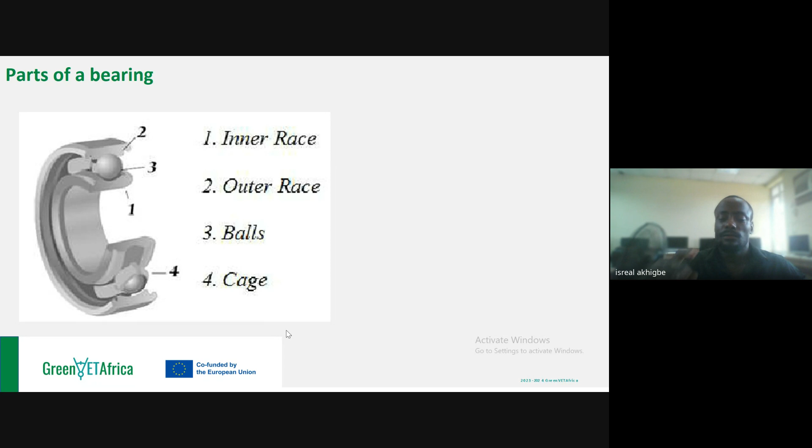So let's proceed to shaft. Now everybody has actually seen a shaft. As long as you've seen a cylindrical piece, whether it is wood, metal, or plastic, it is a shaft. So when you see a cylindrical piece of material, we call it a shaft. If it is wood, we say a wooden shaft. If it is metal, you say a metal shaft. If it is plastic, you say a plastic shaft.

But in the world of mechanical drives, lubrication and maintenance that we use in areas such as waste management, we'll see more often metal shafts. So when I say shaft, it's just a cylindrical piece of material - that's in the layman term. Now, shaft is a member, usually of circular section, which supports gears, sprockets, pulleys, and rotors.

Now this is another component, component number two that supports transmission. Bearing, as we spoke yesterday, helps support rotation by reducing friction and allowing operation to run smoothly. Also, shaft is a member, usually of a circular section, which supports transmission system components - gears, sprockets, pulleys, rotors, etc - and is subjected to torsion or axial load, acting singly or in combination.

So what does this mean? If this supports the transmission system, and the transmission system helps us get rotation from our driver to our driven in our waste recycling machineries, remember that your rotary motion is coming from your driver, and your driver is the source of rotation. It has its own form of power, torque, which is the rotating force or turning force of the body. So that rotary motion from the driver has a turning force - it has some amount of force which can do work.

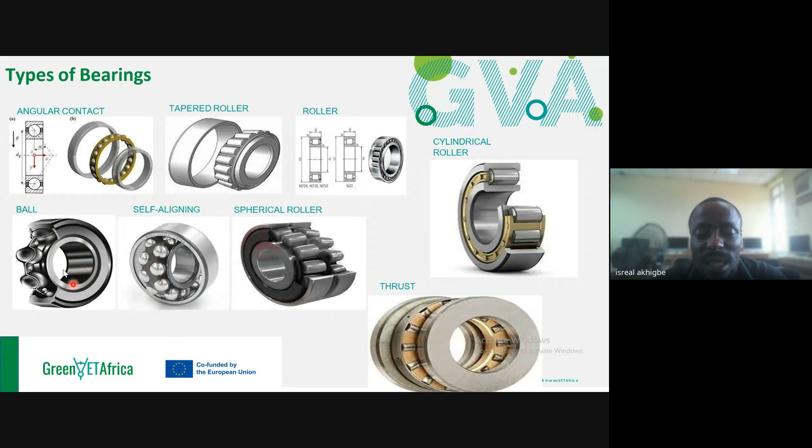From our mechanical measurement and fitting in waste management, we spoke about clearance and fit, limit and fit. So fitting, mating a shaft going in to mate with this bearing, the inner race of the bearing, so that when rotation is sent, this bearing suspends the shaft and it can freely move, or freely rotate. Similarly, because you have certain load experienced on the shaft, it also translates to the bearing. The bearing also takes some of those shocks.

A shaft is a mechanical component used in various machines and equipment to transmit rotational motion and torque from one part of the machine to another. It is used to transmit rotational motion and torque. Remember I spoke about torque - if torque, as I've always defined it, is the turning force of a rotating body, that force will also be felt and experienced on this shaft.

And if that force is excessive beyond what the shaft can bear, or there are certain factors like misalignment, improper balancing of the foundation, etc., it will cause damage and defects to the shaft. Take this shaft as an example of a pillar of a building, and the building itself is resting on the pillar. If the building weight gets tougher and bigger than the pillar, what happens? The pillar will start having defects - it may want to bend, it may want to break.

Similarly with your shaft, when the load is too much - first the load of the rotary motion, second depending on where the shaft is used - if the shaft is being used in a conveyor belt system to transport waste from one side to another, what then happens is that some of the force from the rotary motion will be felt on the shaft and on the bearing.

Then the waste itself, if the weight of the waste is too much on the conveyor, that extra weight will also tell on the shaft. So two loads will be coming from different angles. This brings us to the point that the shaft can be subject to torsion or axial load, or a combination of both. I don't know if you understand what I'm saying, or if you're getting the gist.

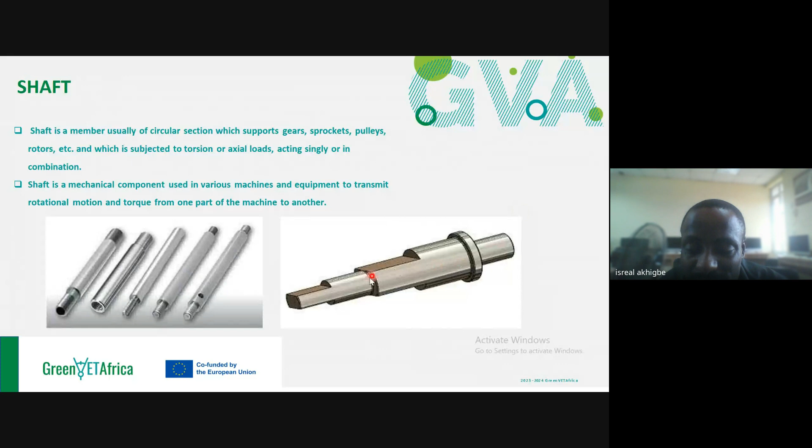A step shaft is the type of shaft you're seeing here that has different diameters. You see this smaller diameter here, and this extra portion you're seeing here, it can take in more shock. So if I mount a pulley around here, even when it's transmitting rotational force, because this is a wider surface area and wider diameter, it can take in more.

It can to an extent withstand some of that stress. Unlike if I put the pulley only on this straight diameter, eventually if the stress is too much, it might actually bend the shaft. But this step shaft will take a great deal of time to bend. As a result, we can use this shoulder, this step shaft, as a good practice to mount and support our transmission system.

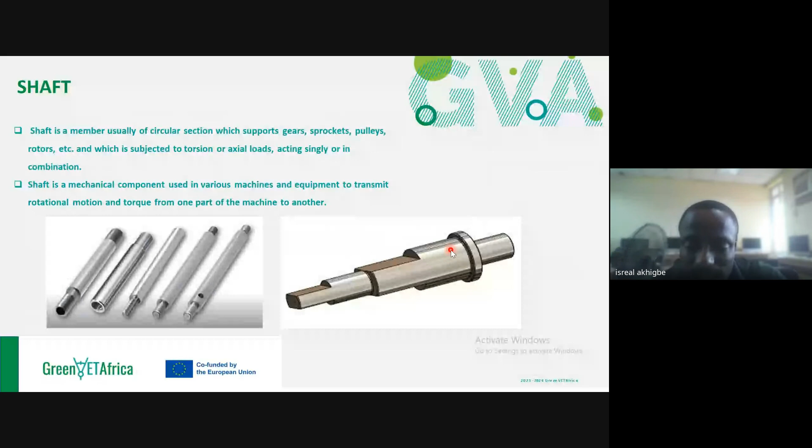Our transmission component like the gears and the pulley. In the case of a sprocket, it already has a hole that allows the shaft to fit in, so you don't really need that. This extra diameter you're seeing here is called a shoulder. Please take note of that. It is called a shoulder, as in your head, your shoulder.

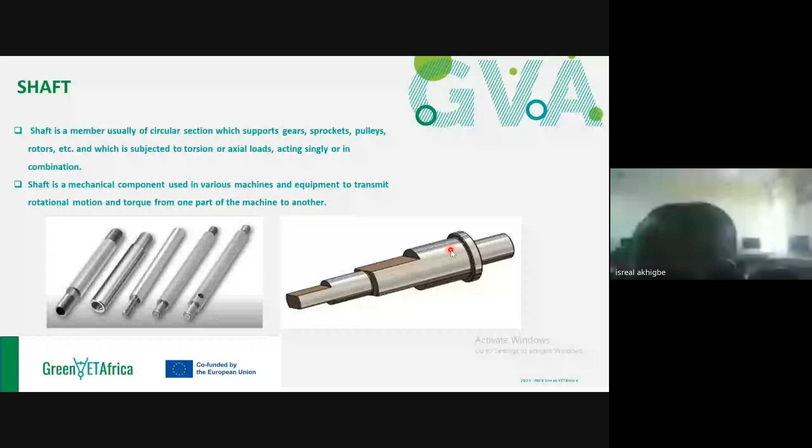And that is where most of the pressure, most of the load, will be felt. However, because of the bigger diameter, it is able to withstand that shock.

Now, types of shaft. I already made mention of plain shaft. So if you look at this plain shaft here, what will you observe? They have consistent, even and parallel diameter. Everybody take a look and observe. Can we see that it has even diameter? The diameter is even, same all through. Parallelism is what is good here.

Now, we also have another type of shaft called drive shaft. You find this usually in vehicle and automotive transmission systems. Also, there's the propeller shaft. Many of you have seen it but don't know. If you see all these big tippers and trailers moving on the expressway, check underneath and you'll see a straight rod that is rotating.

That straight rod that is rotating, that straight shaft, is a form of transmission transmitting to the differential gears of your vehicle that will send motion, or uneven motion, or torque or speed to individual tires. Especially when you want to make a right turn or a left turn, it is the propeller shaft that is responsible for that.

So in our case here, if you look at your garbage truck, underneath it you should find something like this - they call it the propeller shaft. You also have spindles, crankshaft and camshaft, then wheel and axle. Now crankshaft and camshaft are special types of shafts. Yes, you may see them, but not all too often. But really, they are not scarce to see - they are usually in vehicles. So these are just to mention a few.

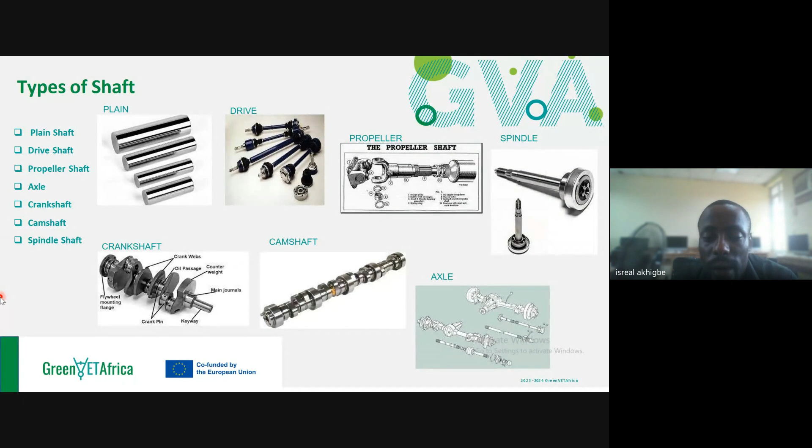Now application of shaft in waste management: power transmission. Shafts are used to transmit power from a motor or engine to various components of waste management machineries, such as conveyor belts, shredders, crushers, and compactors. They ensure that the rotational motion from the power source is efficiently delivered to these components, enabling the processing of waste materials.

Now, conveyor systems are widely used for transportation of waste material. Shafts are an essential part of conveyor systems, connecting the drive motors to the rollers or pulleys that move the conveyor belt. They help convey waste material from one point to another within the facility, facilitating sorting, processing, and transportation.

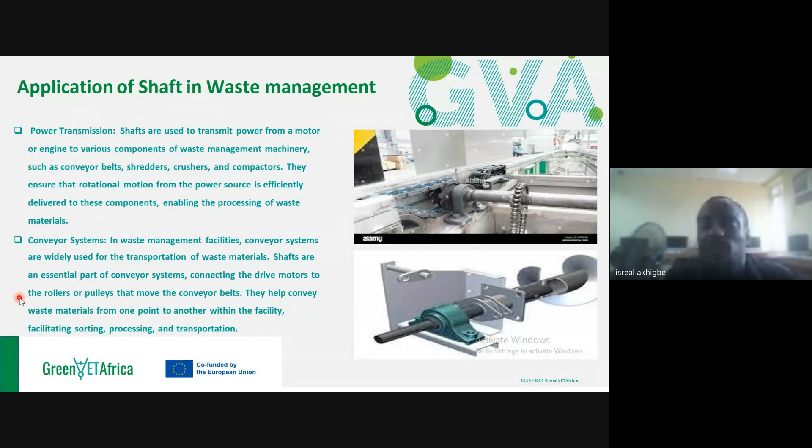Now let's talk about loads on bearings and shafts. Remember that both bearing and shaft are aids that support the transmission system.

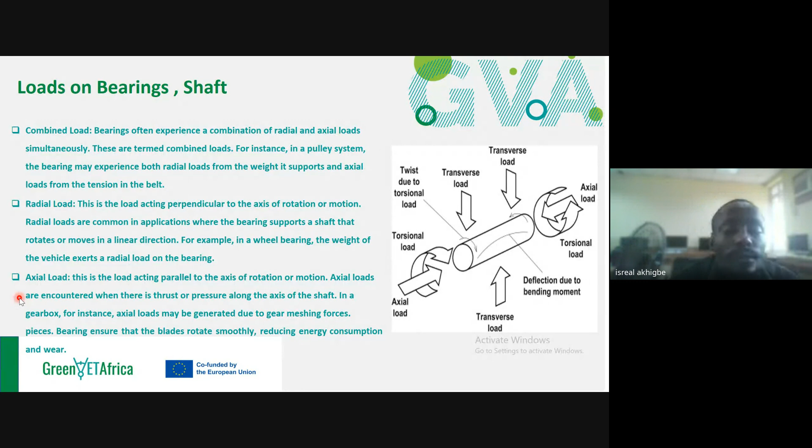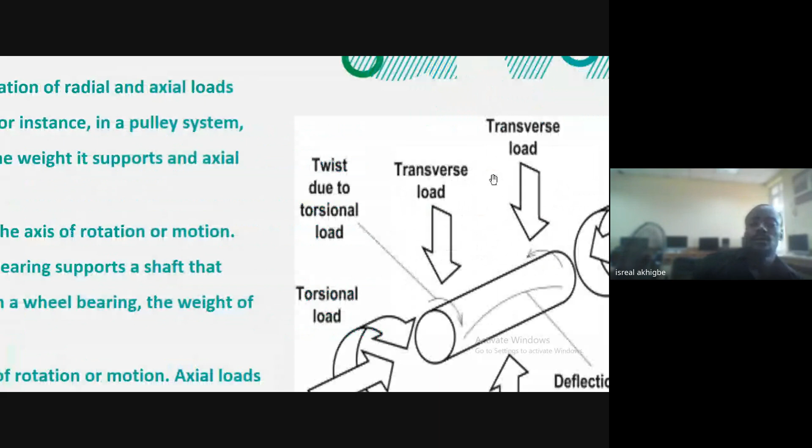Let's talk about combined load that bearings often experience. Now look at this image here. What you see is a straight shaft. Transverse load, according to this arrow, is a type of load that is experienced vertically while the shaft is in operation - a vertical force on that shaft.

Now we also have torsion. Torsion load is twisting, where the shaft, by virtue of transmitting and helping rotary motion gotten from the prime mover, experiences a form of squeezing. It looks as though the shaft is squeezed - that's called torsion. Sometimes it can be squeezed and bent, which is called torsion and bending. That is actually a defect, but we're talking about loads now.

So you see this side that has the forward arrow cutting all the way through - axial load means a load experienced horizontally, allowing for back and forth movement. In a horizontal pattern, we have that load experienced on the shaft. So, axial load, torsional load, deflection due to bending moment - these are some of the things you experience when working with mechanical drives maintenance and lubricant systems on an engine, or in a plant of waste recycling processes.

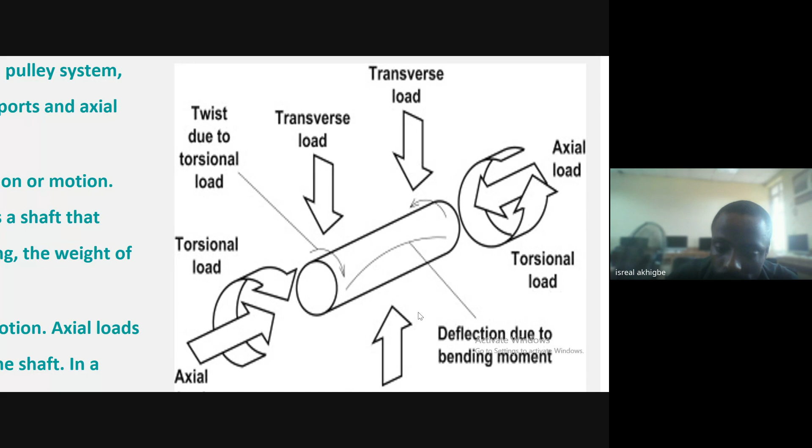Now, radial load - let's talk about combined load. Bearings often experience a combination of radial and axial load simultaneously. These are termed combined loads. For instance, in a pulley system, the bearing may experience radial load from the weight it is supporting, and axial load from the tension of the belt.

Now, radial load is the load acting perpendicular to the axis of rotation or motion. Radial loads are common in applications where the bearing supports a shaft that rotates or moves in a linear direction. For example, in a wheel bearing - a ball bearing - the weight of the vehicle exerts a radial load on the bearing, meaning a load experienced around the perimeter. So to remember, radial loads exist around the perimeter of a shaft, the entire circumference - from the word radius, radial load. With radius, you draw a circle across the entire shaft.

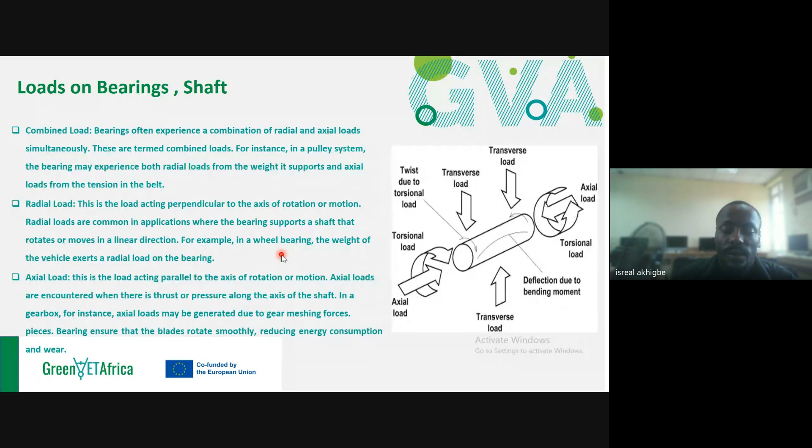So weight overloading can put a serious amount of strain on recycling machines. It can, as a matter of fact, stall it - stop the station. Because it's now overloaded, and the force of the rotary motion coming from the transmission, from the driver to the driven, cannot overcome that overloading.

What will then happen is it will put extra shocks on your shaft or bearing, which will increase the amount of load it experiences. Soon enough you start having resistance, because that rotation is supposed to be transmitted. When you start having resistance, the electrical makeup of that prime mover will start heating up, and before you know it, it will be in flames.

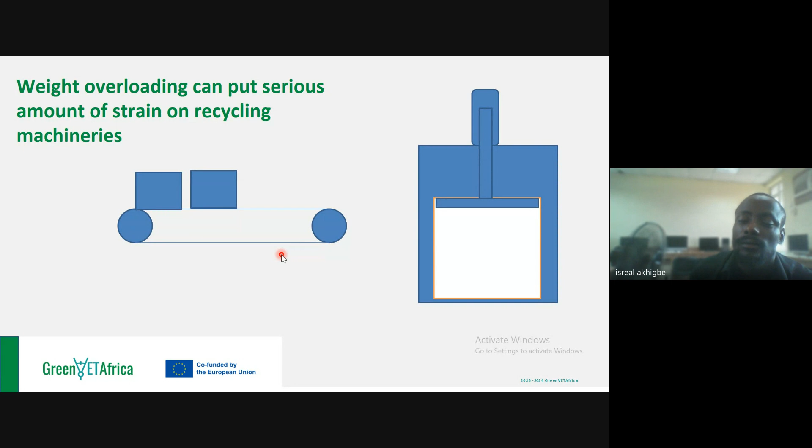So now, effect of load on shaft. The effect of load on shaft.

Now, like I already mentioned before, torsion. Torsion is something like twisting. Just imagine when you're squeezing your clothes, you washed, you did laundry, and you're squeezing your clothes. That's what torsion is like, as well as twisting, like a skewing force occurred on it. Then there's bending, then there's torsion combined with bending, and there's torsion combined with an axial tension or compression.

Now, if you look at this image here, you see that this example is an example of a shoulder on a shaft. Yes, a shoulder. So I already said that if you are going to mount your transmission system, certain things have to be considered, which help us to know if we're putting a bearing, a gear, or a pulley in that region. But like I already said, when you put any transmission component here, the tendency is that you will experience more rotary force around this side. And if care is not taken, it will dent it, it will spoil this step shaft. But in a case where you have machines that can help you quickly machine another shaft, you can give them the dimension such that they create this shoulder that will allow the pulley to rest on them.

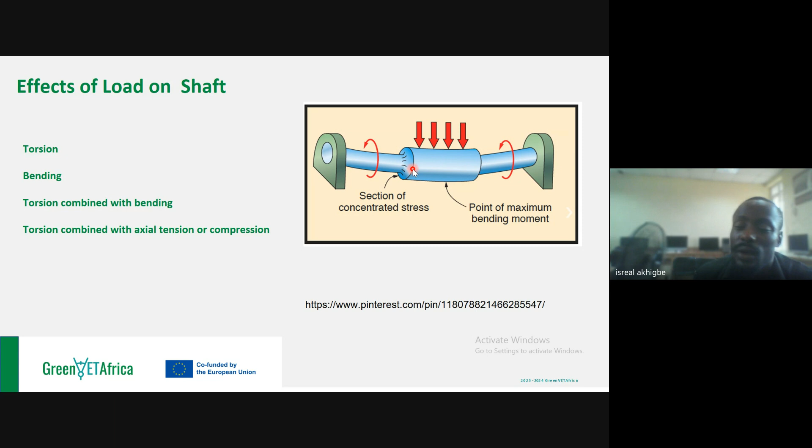Application of shaft in waste management. Shredding and crushing equipment. Waste shredders and crushers are essential for reducing the size of bulky waste material. Shafts are used to connect the motor to the cutting or crushing mechanism within these machines, ensuring the efficient operation of the equipment.

Now we'll talk about balers also. You can find shaft in balers. In recycling facilities, balers are used to compact and package recyclable materials like cardboard, paper, etc. So the shaft plays a role in driving the hydraulic system that compresses and forms this material into compact bale. I already showed us what a baler can do in the earlier video. A baler just helps us reduce waste material to size for easy transportation or for easy storage.

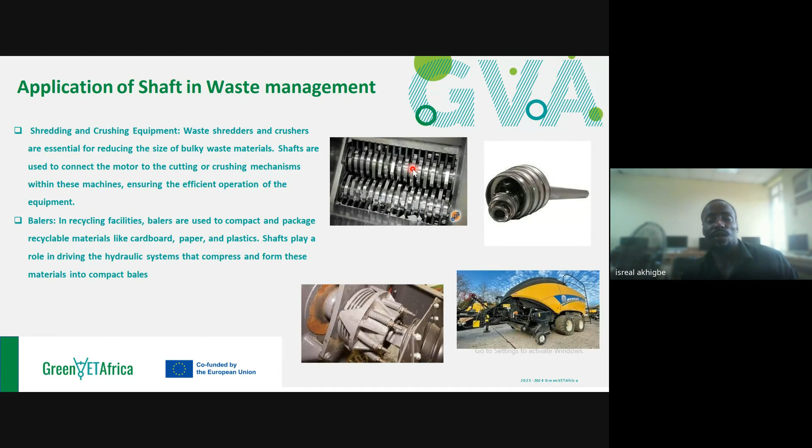This is an example of the shredder teeth.

Now, seals. In as much as there's rotation and there's lubrication on that machinery, what will happen is that when the machine is operating, certain things can happen because we want oil flowing around, so we may have oil seal or nipple gun for grease at different points in the plant.

Now, so let's really buttress this seal. Seals are used to prevent the leakage of liquids, solids and gases from items of rotating machinery and other types of industrial equipment, and to stop dirt and other sources of external contaminants from entering a machine or piping system. So many of us have seen seals, but we probably will not take cognizance of it. We'll still talk about it here.

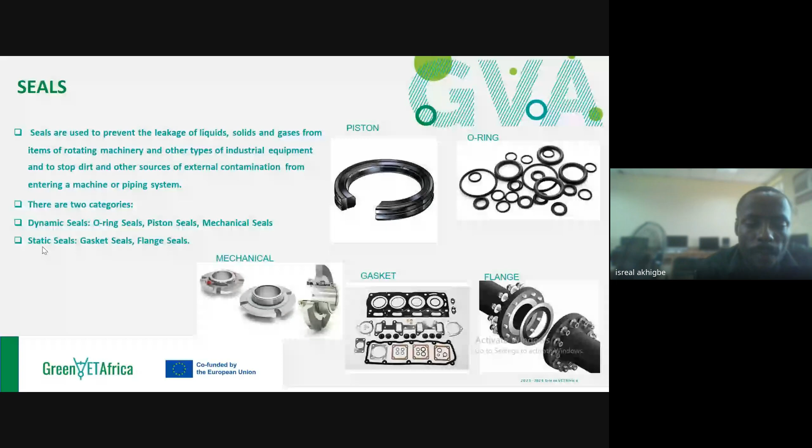Now, mechanical seals. These are seals used in pumps and agitators to prevent the leakage of liquid, especially in water treatment processes. They help maintain a secure seal between the rotating shaft and the housing, ensuring that hazardous or corrosive liquid does not escape into the environment. In wastewater treatment plants, mechanical seals are used in pumps - not the conventional type you see in domestic homes. They might be similar in look, but they're heavier and bigger in wastewater recycling plants. Mechanical seals are used in pumps to prevent leakages of untreated wastewater.

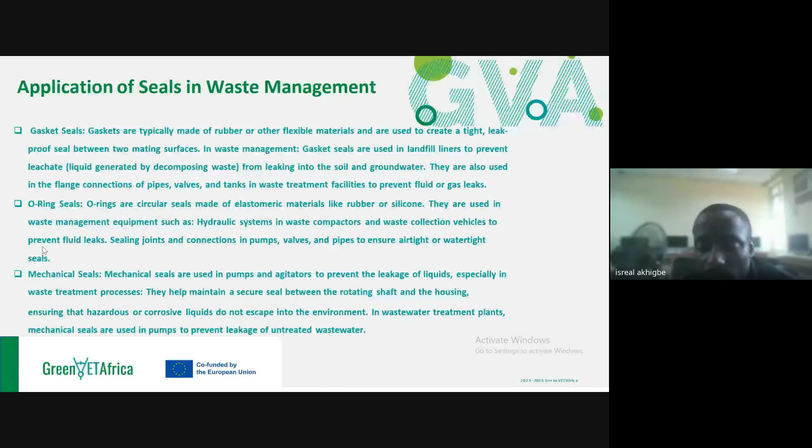So we talk about couplings also. We've been speaking about things like alignment you look out for when mounting. Now, what is a coupling? A coupling is a mechanical device used to connect two shafts or components together. Coupling, from the word couple - when they say a couple it involves two human beings. Going as layman as possible, a couple is husband and wife, two persons making up one. Similarly, coupling in mechanical drives, lubrication and systems for maintenance, in waste management, entails merging two pieces together to become one.

Now, when we do that, what happens with that analogy? We can now say that shaft one and shaft two coupled together will produce a rotation. So we can say we successfully use a couple, or these two are coupled to each other. From the word couple, use layman term to remember, then you know what a couple is.

A coupling is a mechanical device used to connect two shafts or components together, allowing them to transmit power, motion, or literally anything that is happening on the driver, the one that is giving us that rotation.

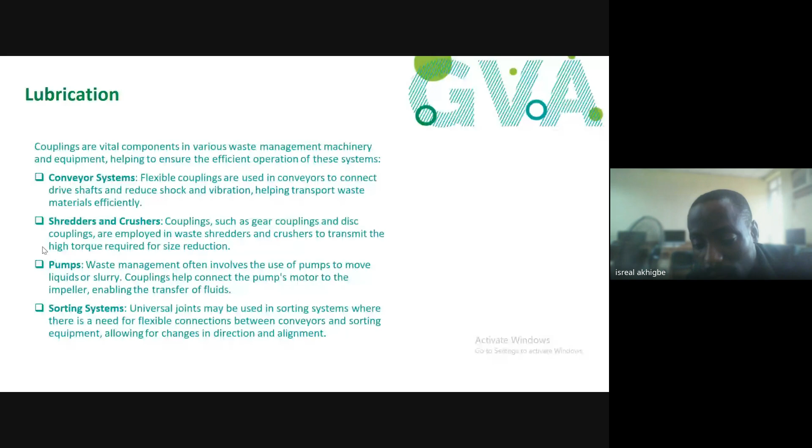In a case where you are short of length of a particular shaft and you need to transmit motion, and you have couplings, you can also use your couplings to join them together so you have a singular output rotation coming from either a transmission system or from the rotary system directly, from the driven system.

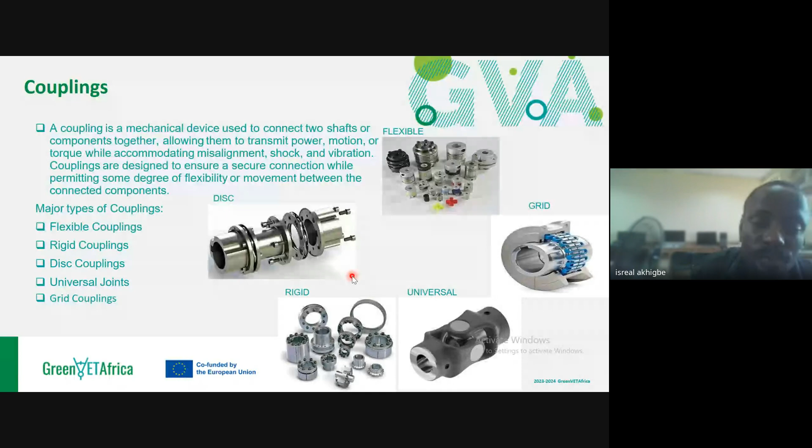Couplings are vital components in various waste management machinery and equipment, helping to ensure the efficient operation of these systems.

Conveyor system: we use flexible couplings which are used in conveyors to connect drive shafts and reduce shock and vibration, helping transport waste material efficiently.

Now, shredders and crushers. Couplings such as gear coupling and disc coupling are employed in waste shredders and crushers to transmit the high torque required for size reduction.

Now, let's talk of pumps also, where you can apply couplings. Waste management often involves the use of pumps to move liquids or slurry. Couplings help connect the pump's motor to the impeller, enabling the transfer of fluids.

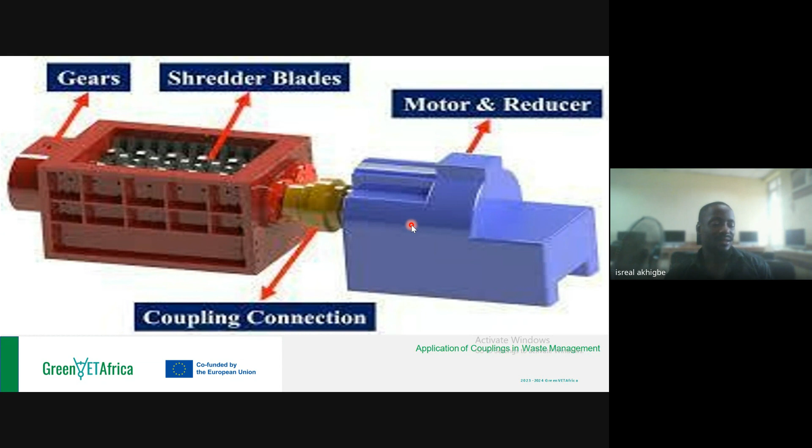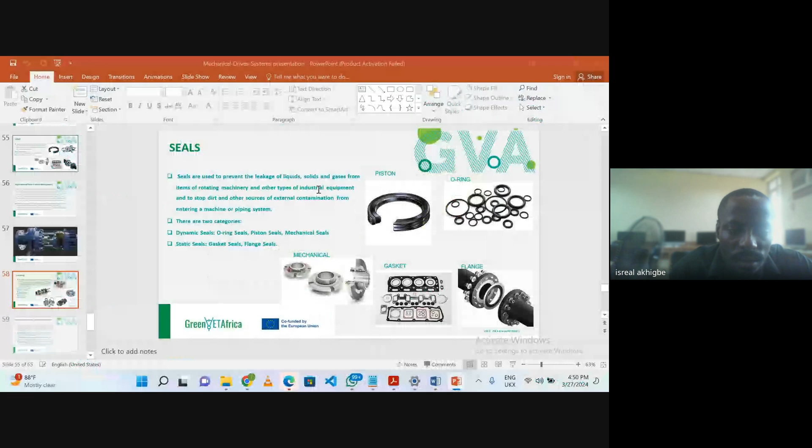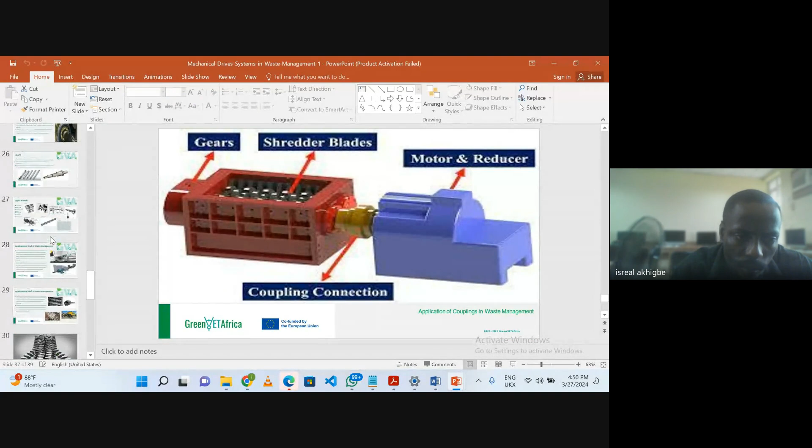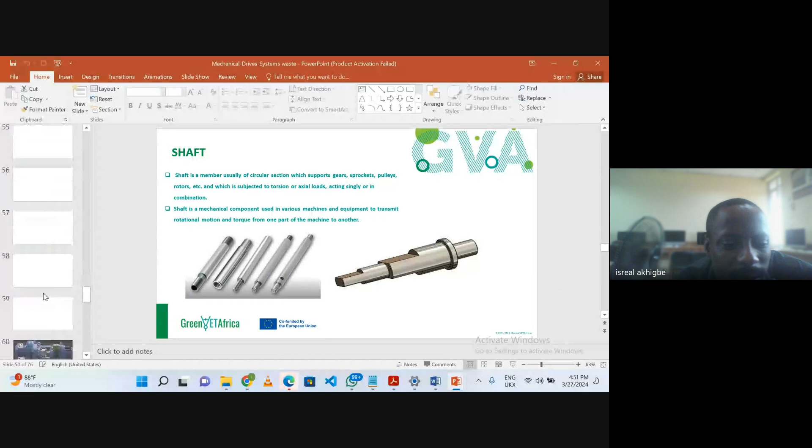Couplings, rather lubrication. Sorry. So now, just a minute, pardon me. Okay, just a minute. All right, so now we'll just take a few notes on this. Allow us to give more extensive notes on lubrication as a whole. Apologies for that, I had quite a number of them opened.

Lubrication is very critical. Remember when we spoke about metal to metal contact, what happens? There's increased heat, friction, etc. Because we have rotating bodies, our waste recycling machinery rotating and doing work from one form to another, there's metal to metal contact. So it is expedient that we carry out lubrication. Lubrication is very key. One of the chief things you need to keep your machine up and running is lubrication. It can greatly improve or increase the lifespan of that machinery.

Lubrication serves to reduce friction as well as to prevent wear and corrosion, while shielding against both solid and liquid contaminants. In theory, under optimal conditions, a suitable lubricated bearing could endure forever. But this is not the case realistically. A bearing that receives appropriate lubrication can stand the highest chance of attaining maximum service life.

Lubricant forms a protective thin film layer between the surface of mating components, preventing metal to metal contact, even when subjected to heavy load. Rolling bearings are typically lubricated with grease or oil.

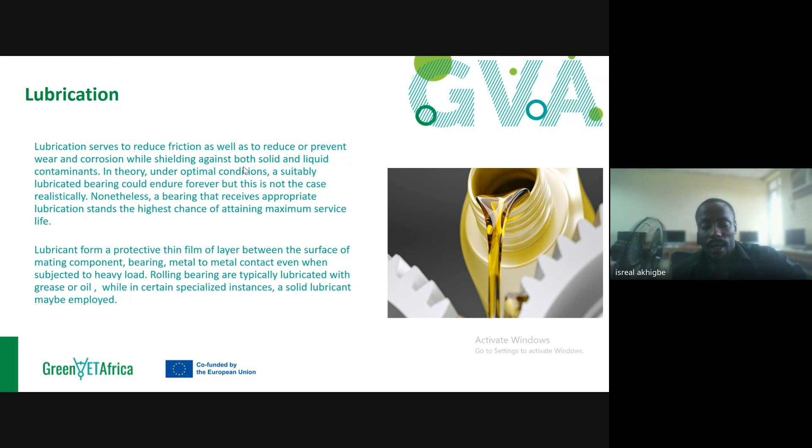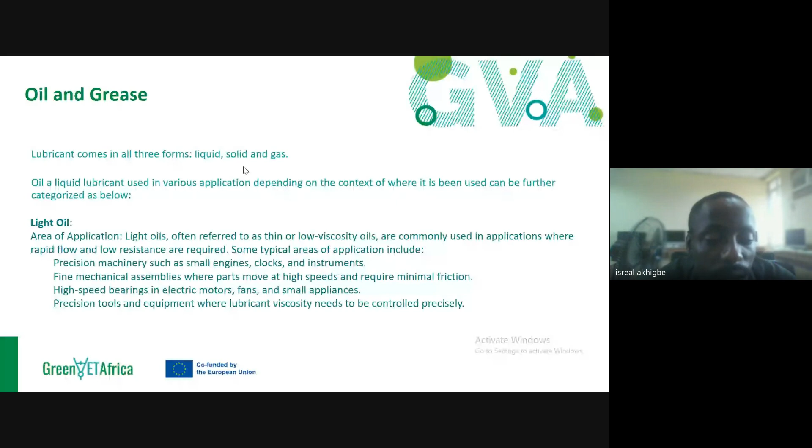Light oil. The areas of application. Light oil is often referred to as thin or low viscosity oil. Areas of application of light oil: light oils, often referred to as thin or low viscosity oils, are commonly used in applications where rapid flow and less resistance are required.

Some typical areas of application include precision machinery such as small engines, clocks and instruments, fine mechanical assemblies where parts move at high speed and require minimal friction. You can also use this light oil in high speed electric and small appliances, precision tools and equipment that need to be controlled precisely.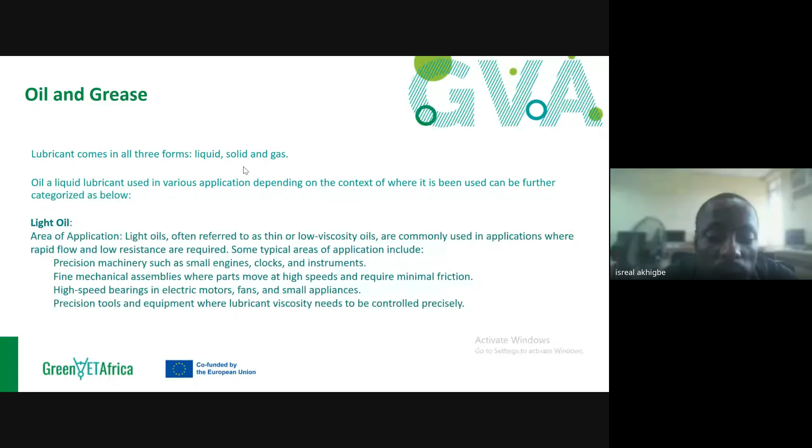All right, so let's talk about medium oil. Medium oil, just like light oil, has viscosity. Viscosity is the flow index, or better put, the opposition or resistance to flow of a liquid. How viscous is it? This is the ability for that liquid or lubricant to flow. If it's very thick, it will be very difficult or very slow for that oil to flow. That would then say that oil is a medium kind of oil.

Medium oils have viscosity ranging between light and heavy oil, making them versatile for a variety of applications. Some common areas of application include automotive engines, particularly in moderate operating conditions, industrial machinery such as pumps, compressors, and gearboxes operating under moderate load and speed, hydraulic systems in medium machinery, sliding mechanisms and bearings in general purpose industrial applications.

Now we'll talk about heavy oils. Areas of application for heavy, high viscosity oils: they are utilized in applications where high load, extreme temperatures, or slow speed are present. Some typical areas of application include large industrial machinery such as heavy duty gearboxes, rolling mills and crushers for crushing things, marine engines and equipment operating in severe conditions, low speed bearings and heavily loaded components in mining, construction and heavy manufacturing, open gears, chains and wire ropes subjected to high load and harsh environments.

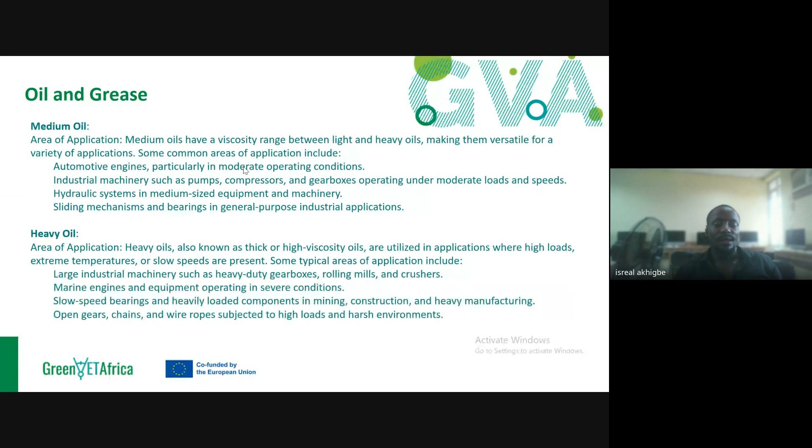These are areas where you can use heavy oil. Sometimes if you happen to use heavy oil, let's say in your automobile, it may be hard and difficult for that automobile to start because that oil has to overcome that force. Inside your oil sump in your vehicle, if you use heavy oil, it has to accommodate for that heaviness of oil. So this kind of heavy oil is used in areas where there's high load demand.

Grease can be solid or semi-solid, which is actually oil with a soap thickener added, used for bearings operating under normal speed and temperature conditions. It is simpler and less expensive to apply than oil.

Grease offers better adhesion and better protection against moisture and contaminants. Approximately 90% of bearing applications employ grease.

So when you come around, I'll show you something called the grease nipple. That is where you apply grease for your bearings.

If you are trying to lubricate your bearings, you don't try to open it or separate them, but you can lubricate it through a port provided by the manufacturer, because many bearings employ the use of grease.

Now, gaseous lubricants. Gaseous lubricants refer to a lubricating substance that exists in a gaseous state, typically as a gas or vapor.

Gaseous lubricants are utilized to reduce friction and wear between moving surfaces, and are often employed in high temperature and high speed applications.

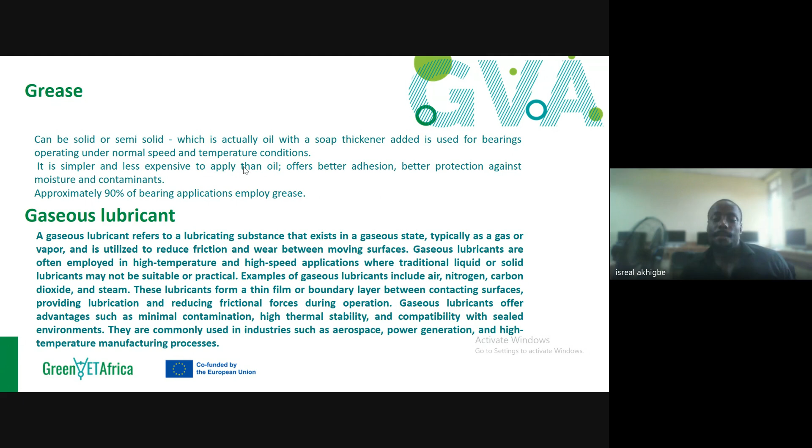They also offer high thermal stability, which is the heat handling capacity of gaseous lubricants, and compatibility with sealed environments. They are commonly used in industries such as aerospace, power generation and high temperature manufacturing processes.

So having said all of this, how then do we know what time to schedule routine checks to carry out maintenance, etc.? That is where you have maintenance and management.

Maintenance and management entails structuring maintenance activities in alignment with clear and agreed upon policies established by senior management, waste agencies executives, etc.

These individuals bear direct accountability for it. This policy will be conveyed to maintenance engineers, outlining the acceptable standard of maintenance that serves as their guideline.

Objectives of maintenance management: to prolong the lifespan of assets. As an investor, or as somebody managing a machine, you also want to be constantly productive.

So to prolong the lifespan of the asset, you need to carry out certain maintenance routines and routine checks on assets, process and waste processing machineries.

This includes opting for maintenance over replacement when financial constraints prevent immediate replacement.

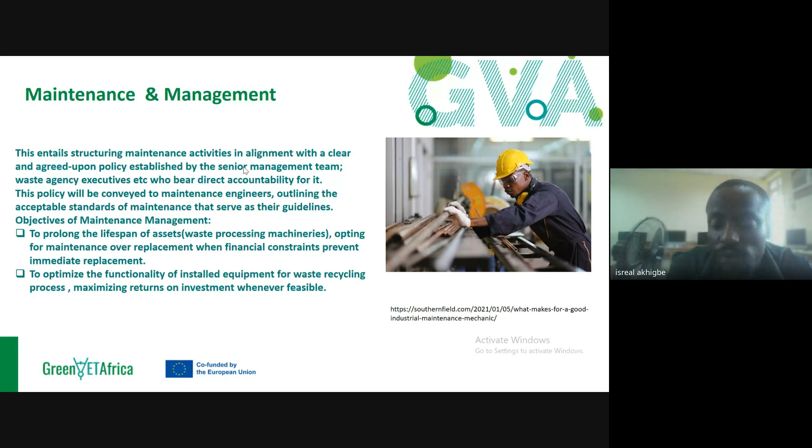Remember we spoke earlier that waste can also be a source of livelihood. So at some point we want to ensure we're having consistency in waste recycling, since it benefits people as a source of livelihood.

Now, maintenance and types. What are the types of maintenance really? Because anybody may ask you, so what are the types of maintenance? We say you carry out maintenance, you try and fix one or two things. So let's talk about what maintenance actually is.

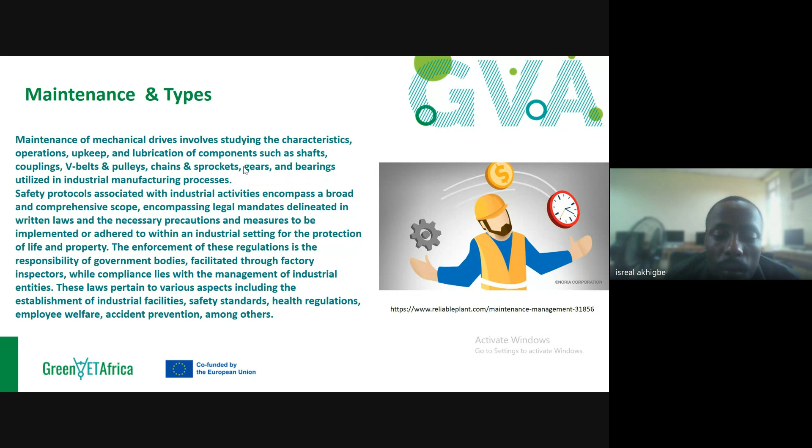Okay, so now types of maintenance. You have unplanned maintenance and planned maintenance, and quite a number of sub-notes under them.

Unplanned maintenance, you have emergency maintenance. This maintenance refers to the type where the task must be promptly carried out to prevent costly damage to assets. Take for instance, you have a very long chain of processes carrying out a waste recycling process,

and something then happened that was unforeseen. You didn't plan it, and as a result, if you continue to run or operate that machinery that does waste processing, the machinery itself or the waste handling machinery can break down. So to avoid that, you need to shut down in a form of emergency maintenance.

Now, let's talk about breakdown maintenance. This is the type of maintenance that is performed that renders equipment unavailable for production or service for a period.

Now, eventually, it has broken down. Let's say, take for instance, when the machine was showing signs that there's an emergency to be worked on, it wasn't attended to. Eventually, when a waste processing machinery is supposed to be undergoing maintenance and is being run and operated, it will have a way of indicating.

So if it is ignored... you want to confirm certain things, certain parameters, while the machine is running.

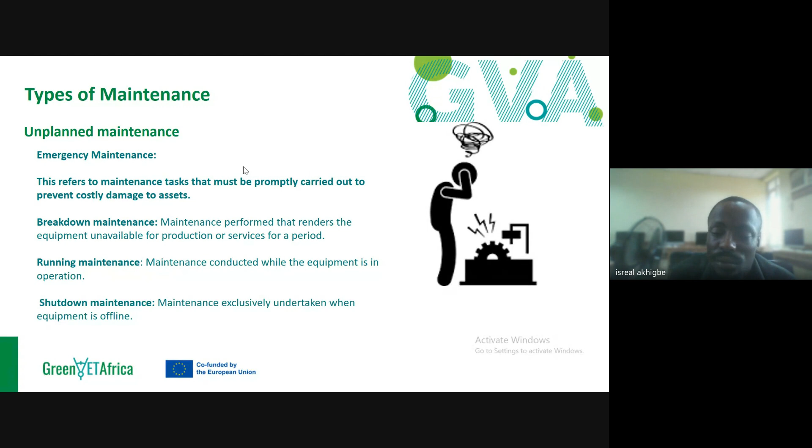Now, still other types of maintenance. We have planned maintenance. This is a maintenance program that's meticulously planned, carefully planned and executed with careful consideration, oversight, and documentation that is tailored to a predefined facility. In our case, waste facilities. It comprises of two main

components: preventive maintenance. This maintenance system focuses on inspection and replacement procedures aimed at preventing the occurrence of defects. Ongoing inspections are conducted to identify loose components such as vibration, misalignment, wear and tear, lubricant leaks, and cleanliness issues.

Scheduled shutdown inspection involves dismantling working parts for thorough examination. So basically, preventive maintenance has to do with forethought. You already have a concept, a thought of the machinery you're working with, as to when is best preferred to carry out maintenance so that no eventualities can occur.

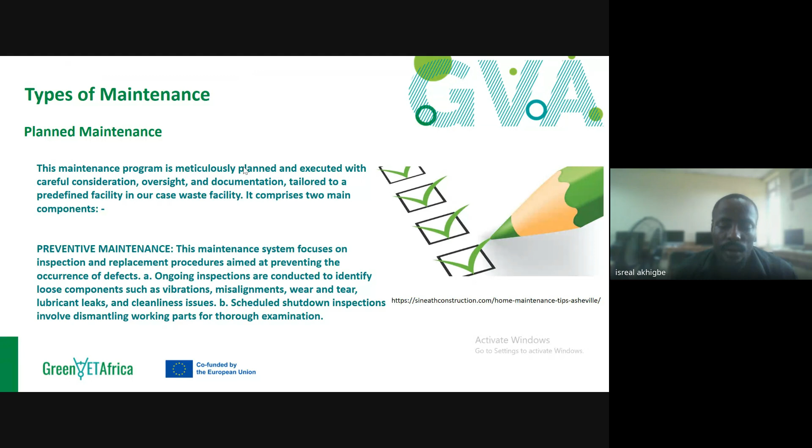Now, corrective maintenance. Just as they say that prevention is better than cure, it is better to have certain things prevented than have a form of breakdown.

Now, corrective maintenance. This maintenance program is implemented at predetermined intervals to minimize the risk of equipment failing to meet acceptable standards. You see, they are implemented at predetermined intervals under planned maintenance.

It ensures the operational readiness of all equipment by replacing damaged and worn parts. So now, take for instance, a truck or engine, your garbage truck, if it runs for quite a while going about collecting waste, collecting wasted liquid and solid, whatever form it may come in,

we should carry out lubrication service, that's changing all the filters and lubricating elements and putting a fresh one. Now, it secures the operational readiness of all equipment by replacing damaged and worn parts.

Verification is also conducted to ensure that equipment has been adequately serviced, lubricated, and prepared for operation.

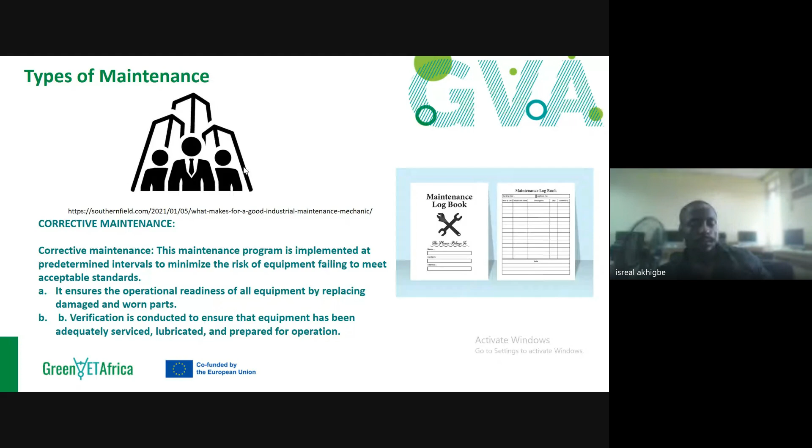And now we're just almost at the end of this. This was something I was supposed to wrap up yesterday, but I don't want to spend too much time. Now, maintenance activity hints: so if you're carrying out maintenance, there's anything you may want to look out for.

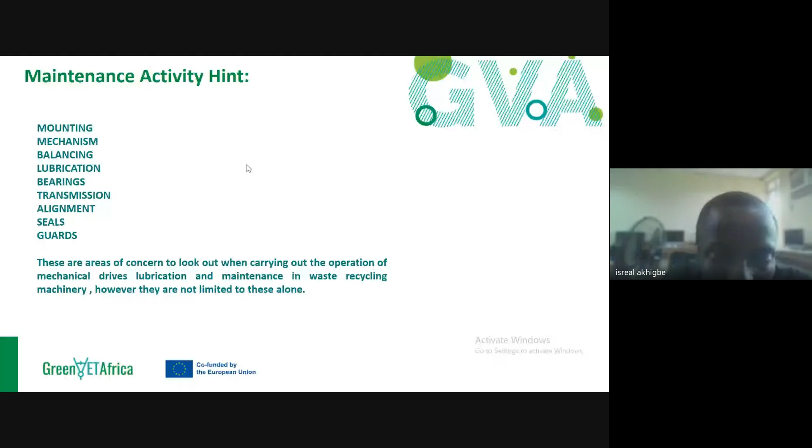Now, these are areas of concern to look out for when you are carrying out operation of mechanical drive lubrication and maintenance in waste recycling machineries. However, they are not limited to this alone. You might have other areas of concern you might actually help out.

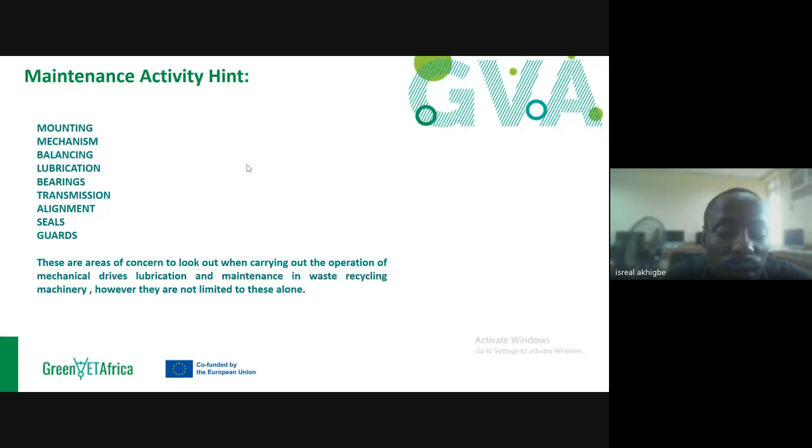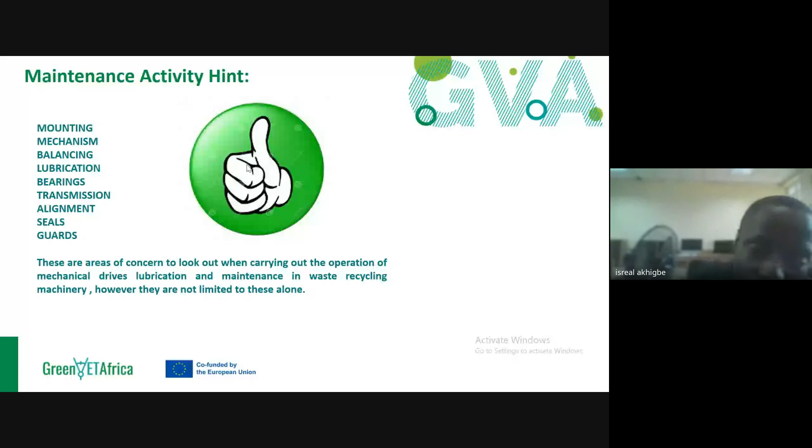So at this point, we can tell that waste in itself, even though it may sound as waste, when properly worked upon, recycled, treated, etc., we can have a useful commodity that is safe for consumption. We discuss, we also implore that you are waste conscious, so that we can find a way to reuse our waste, so we have little waste exposed to the environment.

And that brings us to the end of mechanical drives, lubrication system, and maintenance.